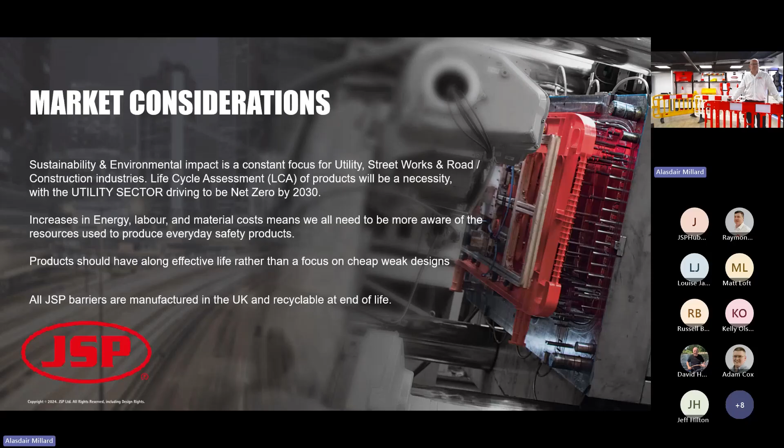Right, so we're uniquely placed, and you'll see a short video where I run through this for you. We are the only manufacturer that blow molds 2-metre barriers and injection molds them. No one else has that facility, so we've been running a project to compare the two manufacturing styles and what that has as an impact on the industry, but also the environment. What we've found, this is the key points here, is that a blow molding uses 60% more energy than an injection molding barrier of the same size. And 3 times more material has to be processed while you're going through this.

So you'll hear me talk about a top section on a premium product weighing about 7 kilos. To do that on a blow molding, you need to process 21 kilos of material. On an injection molding, it's 7. So massive difference. And the cycle times on a blow molding are 6 minutes, and they're 3 minutes on an injection molding. So half the cycle time. Massive difference. Massive change to your labour and how we impact the environment. This is something we feel the industry really needs to know about and take forward in its product selections, what you use in the future.

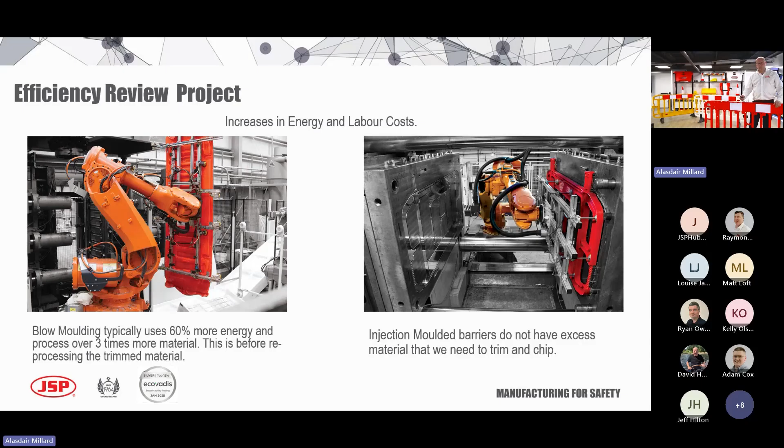JSP is uniquely placed as the only manufacturer that injection molds barriers in large sizes and blow molds barriers in large sizes. It's been that way for many, many years. So what we've learned over time with our injection molded Titan barrier, which is widely accepted as the strongest barrier on the market, and Frontier barrier, which is widely accepted as the strongest blow molded barrier on the market, is what do we learn from this? What are the differences in how they're manufactured? So on premium products, you have a weight when all the feet are removed of about 7 kilos.

So when you process a blow molding, which is the Frontier here, when we mold that 7 kilo section, we actually have to process 21 kilos of material. The material is dropped through, blow molded, and then all the excess around the outside and in between has to be manually cut out and then rechipped and reprocessed and reused. But the cycle time is also 6 minutes, which is quite long. That's what blow molding does. When you compare that to a 7 kilo Titan molding, it's only 7 kilos of material that you process and mold.

There's no wastage, there's no cutting around the outside, and you actually end up with a stronger product, albeit it has a stronger material in the first place. So learning from that, we realised that the cycle time is also 3 minutes in comparison to the 6. So using less energy, less material, less wastage, so less impact on the market.

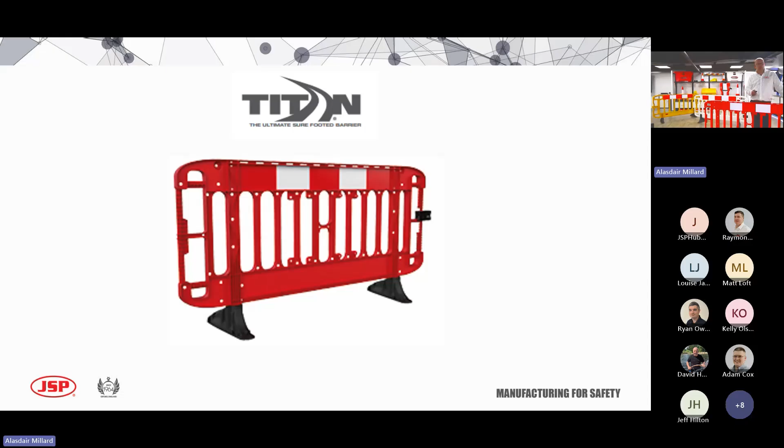Right, next thing. So what we'll move on to now is the specifics about a product. So the first one is our flagship product, our strongest product we have is the Titan barrier, and I've put through some details for you, which will follow shortly. Within JSP's range, we have 4 products that are both injection moulding and blow moulding. Our strongest of which is the premium one, which is the Titan barrier, which we have here, which has Chapter 8 compliance throughout with the handrail, the tapping rail compliant, and then also the reflective strip.

The difference then you get across the range is whether one's premium or entry level. With the Titan being the premium model, we have the extra struts with a 110mm gap as part of BS 7818. We have an extra handle for the guys to move around. You also have the ability to have this in a variety of colours that you may need, and also to mark the product and emboss it with labelling or hot foil embossing at the back, which is a permanent feature and cannot be removed. All within how we will price you the product.

The other options we then give you are to do with the barrier feet. You can have a full spectrum of choice, whether a full foot, an anti-trip foot, a high-vis anti-trip, or even a painted foot should you wish. All of that can be built for you within that range. Other real things we need to consider is how strong this barrier is. It's manufactured from a high-impact polypropylene, which means we actually guarantee you can drive across this with a small vehicle and it won't break. Unlike any blow-moulded barrier, which we make, you cannot do this with any other type.

Part of what you get is because of the strength of the product, which is highlighted here, this is where all the force is applied through the feet and any loading. So when you see barriers that have broken feet or barrier foot connectors that are broken, this is why you don't see this with the Titan. It's all high impact polypropylene and the forces are projected through the whole barrier. Makes it very, very strong and sets it apart from anything else in the market.

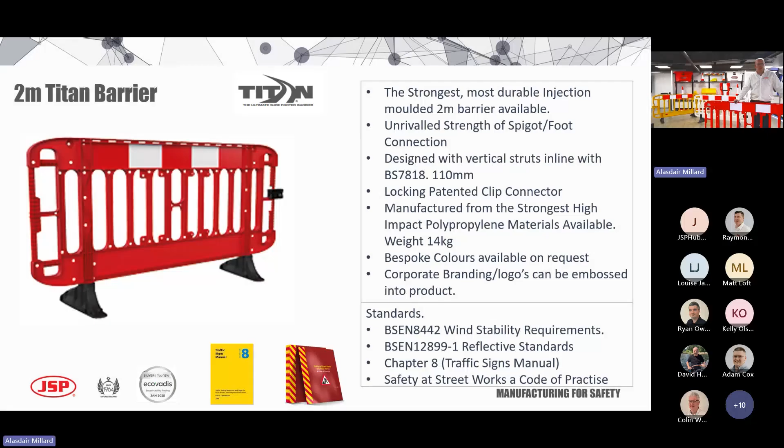The overview here gives you all the details of what it conforms to and how it complies with everything that's required in the UK. One bit to perhaps add on is that obviously this product, the Titan, has full sign fitment areas, lots and lots of locations for you to fix signs to, drainage points, etc. There's nothing worse than collecting water in the winter and then the guys getting covered in it. We've made sure that's all covered for you, and there's multiple sign fitment connections you can see there on the image. But any questions we can answer at the end for you.

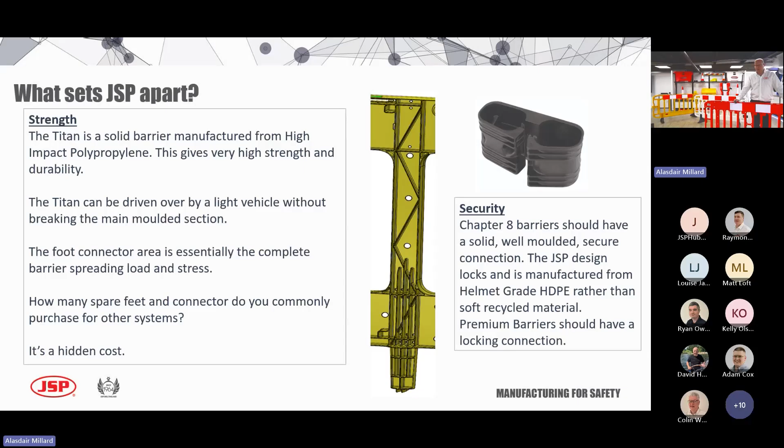Just to recap on the strength points for you, what sets this apart from anything else in the market is how strong the foot connector area is and the whole barrier itself. Any forces are directed through that area that you can see on the screen, and then the locking clip that again is fully patented to JSP that no one else can offer, which means you can make sure your sites are fully secure, particularly important to the utility industry. The next video is your manufacturing video of the Titan, fully robotized.

And now we move on to our premium blow molding. Now, what you will notice the difference is we won't show you a drive over test because there isn't a blow molded barrier on the market that you can drive over without breaking. But this is a premium product. It's the strongest blow molding we offer, the strongest blow molding available across anybody in the industry. You'll see me run through the core principles of what we do for this and the options you have.

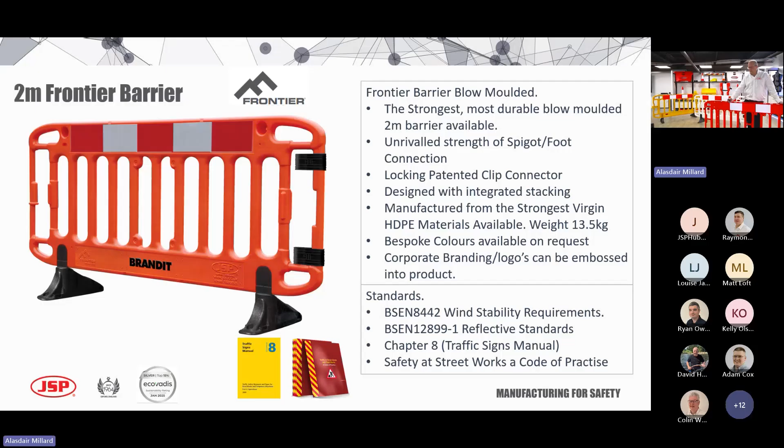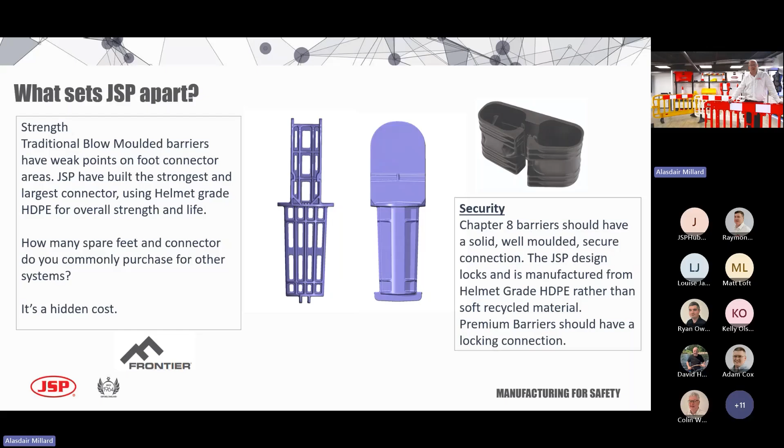Just recap for you there, same as the Titan, because that's what we'll put on a premium product. Strength foot connector because it's made from helmet grade material that we use in the hard hats here, that no one else has access to. It's also 3 times the size of anybody else's. This area is a massive cost for you. If anyone's purchasing barriers, how many spare feet do you buy? How many foot connectors do you buy? And how many barriers do you lose when these areas break?

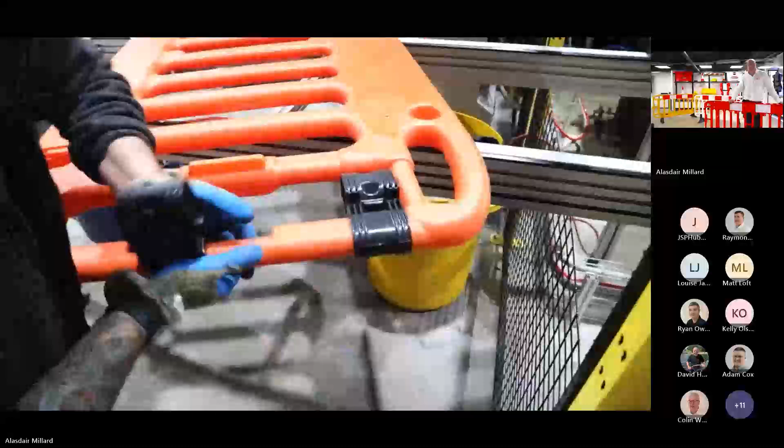You can see how JSP has invested in the manufacturing process of our blow moulding. We also use robots to trim everything, and you can see all the pieces that have been trimmed away, and that we then chip them down and reuse them again. But it is using more energy for that. There's more wastage from the trimming process. But the investing in technology is something we're really, really proud of, and it means any operators that are on the machines are more skilled, more developed, and more backed by us as a company.

We'll now move on to our newest product, which is us looking at an entry-level product, more used for the sites that are less likely to need to be locked, but it uses the principles of what we learned in the project we talked about earlier for our entry-level range of product, which is called the Navigator Plus. Moving on to our entry-level product, the Navigator Plus. This is using our project on injection moulding and blow moulding, comparing the differences and the impact on the environment. What we learned is that injection moulding is a stronger product.

What we've done though is, rather than in the Titan using a high impact polypropylene, we've used a standard polypropylene. So you get the benefit of a slightly cheaper material over the fully expensive, very strong material, but you still get a much stronger item, particularly compared to those others on the market that are in the same category. So we give you a fully Chapter 8 with hand rail, tapping rail and reflective to be fully compliant there, but we widen the gaps into the entry level market range that you would more commonly see.

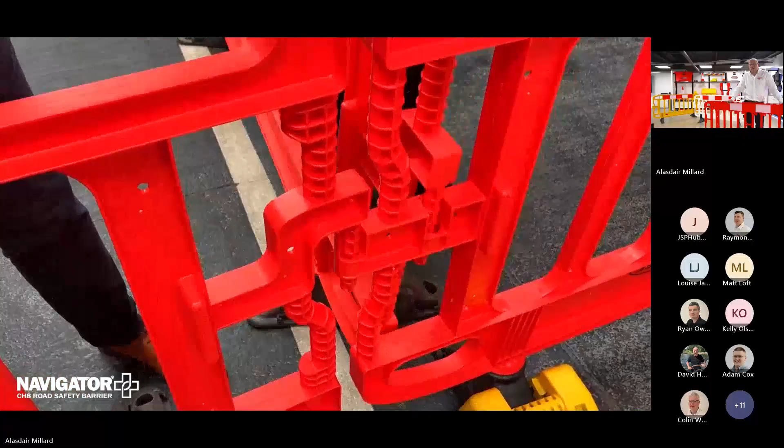We also move across to a pin connection. It doesn't lock because that's a premium product, and that's what high-end customers would expect. Very simple to use though. Pin into a hole, in and out very quick, and we also then give you another location here if you wish the T-bar off to again extend your connections or increase your wind loading. Available only with the anti-trip foot, which is shown here on this one with the black one.

We can colour it for you and paint it, or we can put the high-vis option with the ramp connectors on for you. And the barrier can come in other colours, so we can change it to your bespoke colour should you wish, or use one of our other standard offerings should you need that. And we can hot foil emboss on the rear, which is a permanent feature like the Titan, exactly the same way, where it cannot be removed throughout its life. We can also label the front should you want to have that on there as well. And really stable, really strong, and will be expected to have a long life.

Thank you. So what we don't do here is show you the manufacturing video for the Navigator Plus. It's exactly the same as the Titan, so you get the principles of it from that run-through. But what we do here is just recap for you again what this product has and why it's different from the other two. But yeah, it's made the same way as the Titan barrier.

Just to recap here, we show you what we call the Surefoot Bloc, which is to help your wind stability. This is particularly key. Manufacturers really don't want you putting sandbags looped through barriers, because it puts stresses at points on barriers that we'd rather you put somewhere else. That's why you can also get damage on products as well. If you loop sandbags through, the foot connectors break because you've added weight on the foot area.

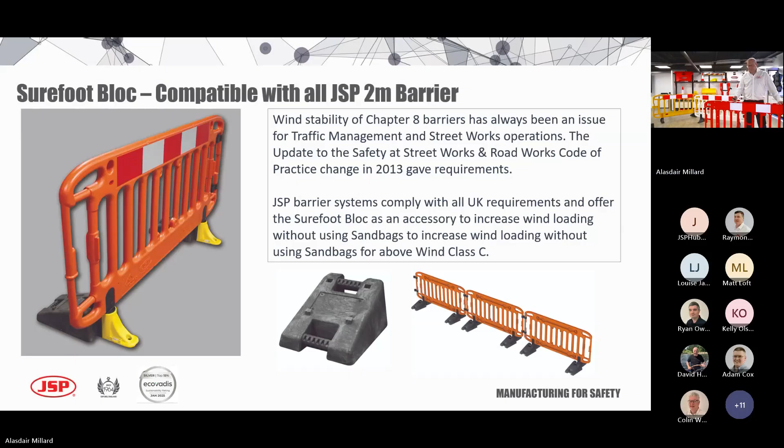We've got to the point now where we're going to see if there are any questions, but I thought I'd open up with one that I'm commonly asked: which product would I pick out of the three for which job? So I'll probably start with the Titan. If I was a major utility or tier 1 contractor working on gas, water, power or telecoms, I really should be leaving my site stable, secure and locked off. So I would always pick the Titan barrier or the Frontier, but particularly the Titan barrier because it's going to have the longest life.

With the locking clip, you can have your full branding opportunities. And we've got products of this design in use for nearly 20 years. So customers had to buy it once. They might change the reflective as that wears over time with any of these products, but that's the only thing they've had. So their return on investment is really, really good. So that's what I would pick if it was my money. That's how I would go about it.

If I have more of a preference for a blow mold design, which is the Frontier in that case, I would pick that because again, I've got the locking clip, I've got the strongest blow molding available, and I've got a really strong foot connector, so it prolongs the life. I just can't drive over it and expect it to last. Like any blow mold, it's going to break. So that's your tier 1s, etc.

If you've got a lower tier contractor that is all about speed, they're just making safe an area that isn't deep excavation, or it's a very narrow opening or a cordoned area, I'd perhaps use the Navigator Plus. It hasn't got all the features of the other two. It's a lower cost, but it's still the strongest entry level product you'll see on the market, and you can fully brand it if you need to. So that's the common question I'm asked, so I thought I'd open up with that for you. Are there any other questions from the group?